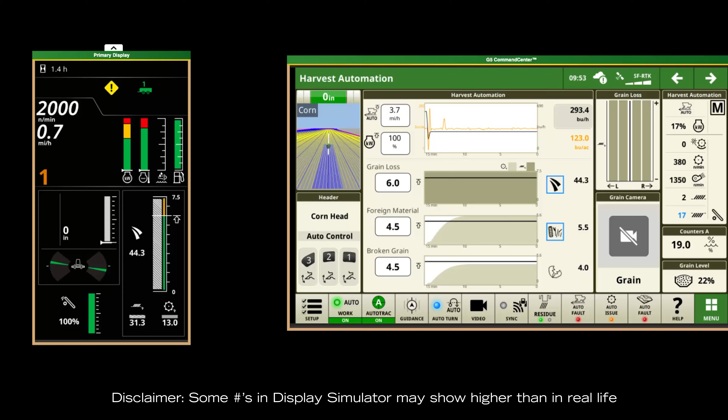Another thing that I really appreciate about John Deere combines is the ability to have a dual monitor, which works really great with the S7s and the new technology packages that come with them. So with a bigger cab and newer screens that are G5s, they're getting bigger, have better picture quality. You can now still see out the combine very well. You have a new corner post display in the corner now that is more rectangular and an actual screen referencing a lot of things that come with technology on the S7s, like your predictive ground speed automation.

In your bottom right, you're gonna have your grain loss monitors that are gonna add up to what your actual grain loss is out of 10. It's always a scale out of 10. We'll get to that in a minute. And then you have your main bar of grain loss just above those two. On the left, you're gonna look at something that's very similar. You're gonna have your feeder house height, and then its angle of attack that it has.

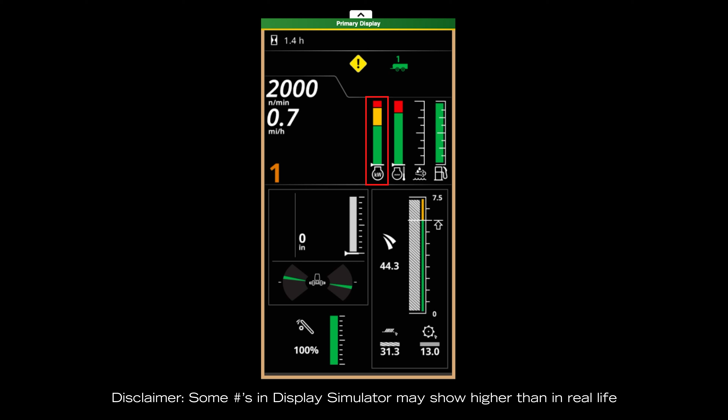Above that is your speed and RPMs, your speed modes that you're at, and then you're also gonna have your most important bar level, in my opinion, your kW bar, kilowatt, right? Is your horsepower. So you're gonna have your green, yellow, and red. That will also have a percentage number right to the left of it that will show what you're at.

What comes with the X9 cab is a feature that many will appreciate, and that's a much quieter operating cab. So when you're inside, this cab does extremely well in every crop that we've thrown through it, keeping a noise level to a minimum that isn't attainable with older models and previous generations from John Deere. So a lot more quietness to your workflow. Now on top of that, you don't quite hear the engine as much. So that bar is going to be extremely important in knowing where you're at.

A combine is going to be the most productive at being full, achieving max throughput, while also maintaining the productivity you want without starting to lose grain out the rear end and not threshing the way you want to. So combines work really well when you have it threshing to the max ability that it can at the speed that you can get. We call that throughput. So that number is going to be extremely important. The closer you get to 100, the more productivity you're going to get out of the machine.

Right to that is going to be your temperature, your diesel exhaust fluid level, and then your fuel level. All of that is also obtainable fluid-wise on your G5 that you can switch. So in between the corner post is going to be our 2 displays. On this model, you're going to have the features that come with predictive ground speed automation that work really well with a dual screen setup. On the top, I like to have the harvest automation page.

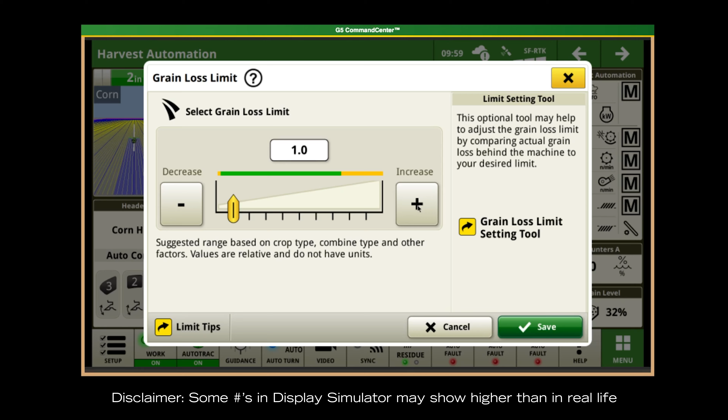It's the end of the year. You see a field that is near a storm that you're getting to. You get into it and that storm's getting closer. Last field of the year. One thing I like to explain to guys is if you just want to get the field done with, the quality of your cut is still important, but you want to get through it faster. You're gonna start opening up the combine a little differently than you would when you are wanting to be more precise. So you're gonna go closer to 10.

So if you don't quite care about grain loss and you want to get the job done, you can start increasing that number closer to 10. So the level that you set is on the left, and then your real-time settings that are being impacted and the numbers that come with that are going to be on the right. So you have your ceiling, and then on the right of that you're going to have your actual real-time numbers.

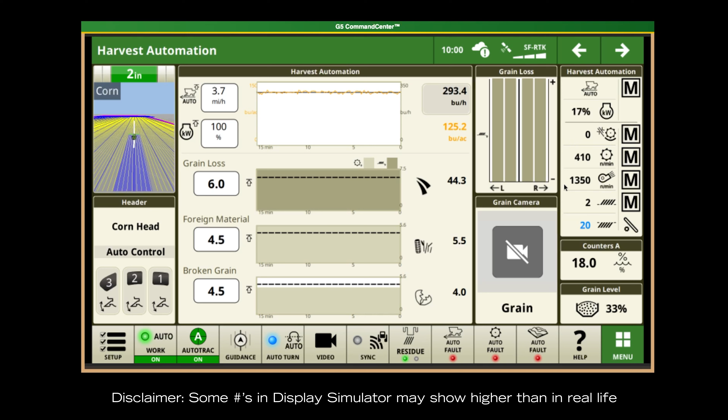To the right of that is your grain loss sensor pad on the left and right. And then on the right corner and all the way down, you can change some of that. For mine, I like to have the grain camera. So we have clean grain going up to the clean tank. You can see that coming through real time while you're seeing what your grain loss is at, your foreign material and your broken grain. And then you're watching your speed just below that. So it's all in one picture, and you still see really well with the X9 cab.

I have it set to show grain level just below that, so that when you're busy, you're focused on your header height now a lot more, because you no longer have to set your speed and keep changing it all day. You can kind of start staying at a speed. So now you can focus on your header. Well, eventually you're looking down so much that you're gonna get lost sometimes looking up at your grain tank through the mirrors, right? Well, having that number right there is just handy. And then I can triple check that with the window image. So that's what I like to have with this machine as a screen.

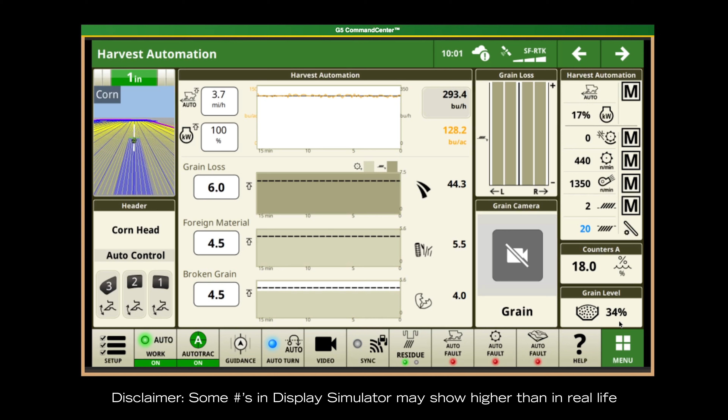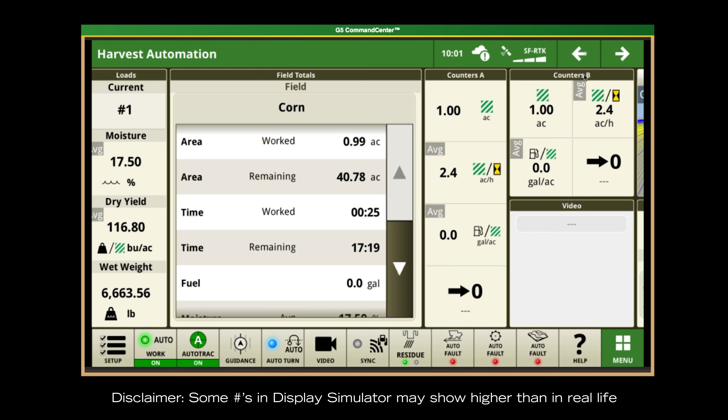And you can still flip and flop. I like to use the top right button to bring up maybe my preferred combine settings. So maybe I only want to see my productivity, my acres per hour, my gallons per acre. Maybe I just want that with my guidance page. All of that is accessible with these two screens, and you can keep playing with them all day. So I prefer to have the predictive ground speed up front. That way I can keep an eye on my crop, keep an eye on my bin, keep an eye on my horsepower and where my header's at height-wise, and it's all in one picture. So that's something I really like about these combines.

When it comes to the armrest, everything is going to be similar to the S7 600s, 700s, 800s, and 900s. So 24 and previous and 25 and newer at the moment are still very similar in the hydrostat buttons. They're all still in the same spot. RPMs, parking, lights, music, and then your traditional concave and harvest settings and that dial that comes with it, all still very similar. So you should be able to go from a 24 model to a 25 and be able to drive it, lower the header, turn everything on the exact same way.

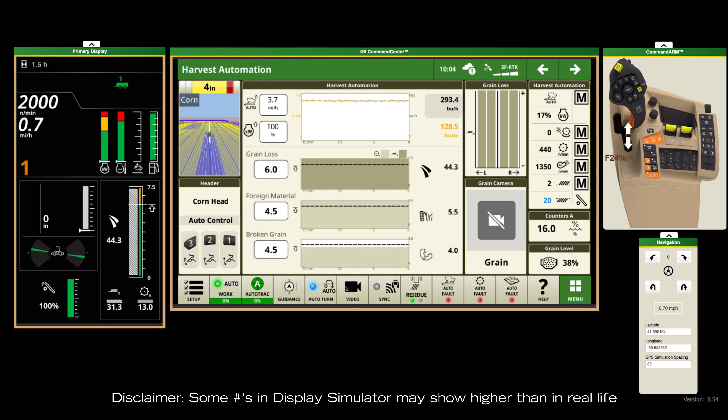With the G5, yeah, it's a very clear picture. So one of the cool things that comes with this model, with your visibility packages that you can get, is cameras all around it. So I have it set on this combine to instantly go to video on my bottom tab. I can check my grain tank camera, I can check my rear view camera, and then I can check my unloading auger. And one of my favorite things is when I'm backing up, I want the backup camera to turn on my screen as soon as I start going in reverse. That way I see what's behind me. When I start going to neutral and forward, it goes back to my main screen.

When I open my auger and I start turning it on, you can have it programmed so that camera turns on, and you can see your nozzle aiming in a grain cart right down to the bottom if it was an empty tank, and see how it's flowing into there, and really get picky now with where you're putting your grain. And lastly, when you have a feature like cross auger shutoff, where maybe you want to time that a little differently, you want to shut that auger off in time for that grain cart to be full, then you can have that auger camera really help you out in timing it just right.

Or if you really needed to, you can still double click the cross auger shutoff function and it will shut off right away. But that camera really helps me and operators pick where I want that to end in 4 seconds. It's really handy. So let's flip this combine around and we'll go talk about some of the features on the back end.